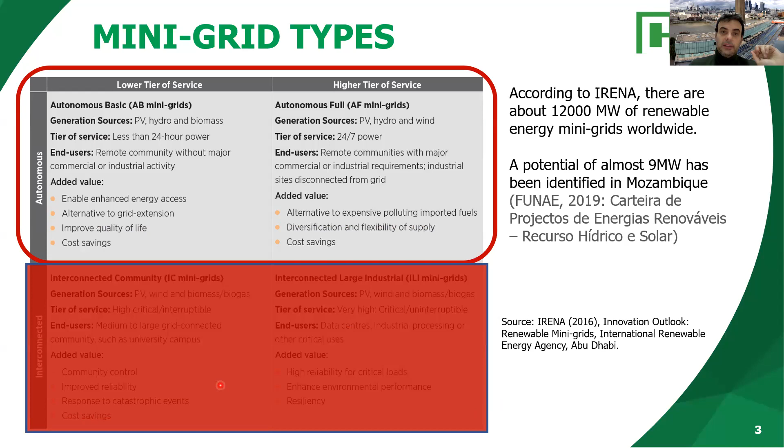Remember, for these case studies, we are talking about mini grids that are autonomous or off-grid. Remember, the world of mini grids is very diverse. We have off-grid, but we can also have interconnected mini grids. All of these we have seen in this course. Different examples, different concepts. Today we are continuing exploring the case of the off-grid mini grids with the particular experience of FUNAE, and the particular steps that we recommend

for the pre-sizing. Always the energy demand on a daily basis. What is your watt-hour per day or kilowatt-hour per day consumption? What is the potential evolution of this consumption? Typically for mini grids in off-grid areas, there will be growth over months or some years. Then the availability of solar resource, we have discussed this plenty, the sun peak hours, our irradiation maps, some website platforms, etc. Also taking into account the variation of the solar resource during the year. Then we move to the calculation of the photovoltaic power to be installed.

Sorry? Somebody's talking. Oh, okay. Yeah, it was Jaime who was entering. He was joining us. Okay, please remember to be muted. Okay, thanks.

Where was I? Yeah, the calculation of the PV system, PV capacity, then the mounting system. What kind of structure are we going to use? Remember in our session about solar farms, we discussed the tracking systems and the convenience of including this kind of increased production, but then we cannot put the same amount of PV capacity. So there is a trade-off there. And of course, the different power conditioning equipment, the charge controllers, inverters, protections, monitoring systems, etc. So with all that in mind, now let's remember our challenge that I gave you last week.

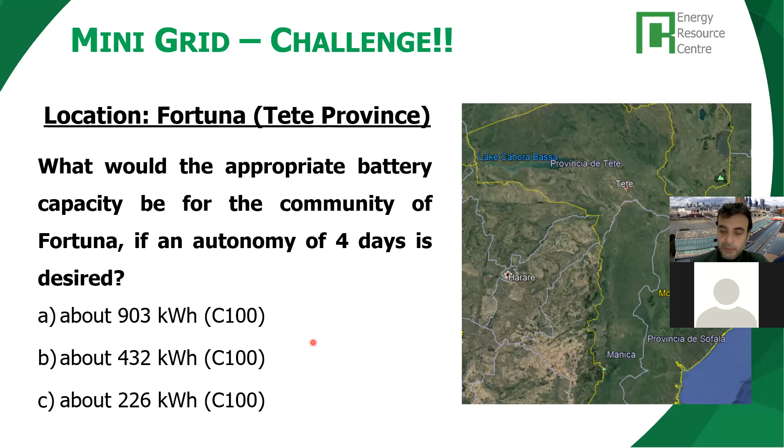So I would also expect a figure around 432 kilowatt hour. Okay, so thank you very much for participating in the poll. I think that was useful for this exercise. Yes. Question. Can you explain the logic for your response on number 2? Number 2 is this one, yeah? The PV generation capacity. Yes.

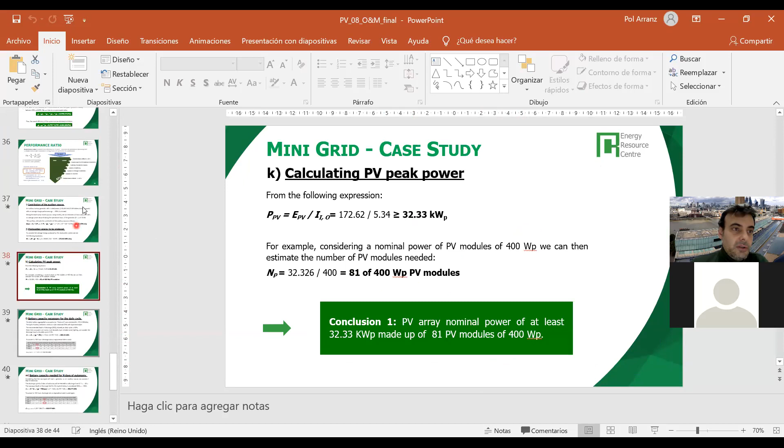Oh, okay. So once we have the demand, what do we do? I have here ready the notes from last session. When you have your design demand, in this example it is 67, more or less, then we need to consider our sun peak hours and the performance ratio. We have done this exercise. So basically we take the sun peak hours. Let's do the calculation. Let's go back to our exercise.

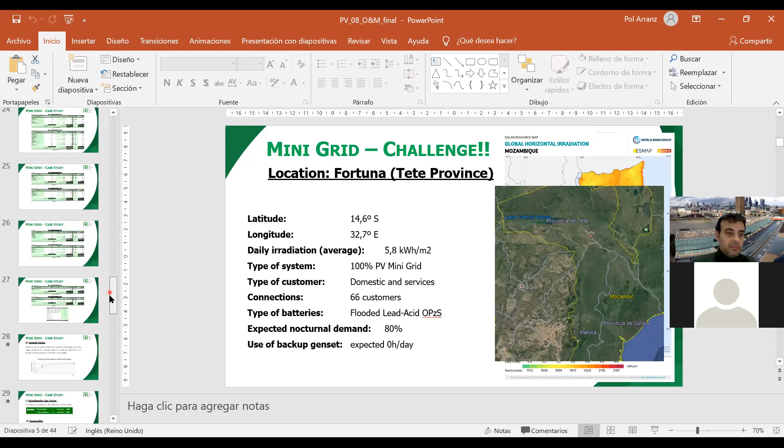You have 67 kilowatt hour per day. You divide that, not multiply, by the sun peak hours, which is 5.8. And then you divide that by your performance ratio, the overall efficiency, which for this kind of systems, remember in our lessons, we normally take between 55 to 70%. So let's take 60%.

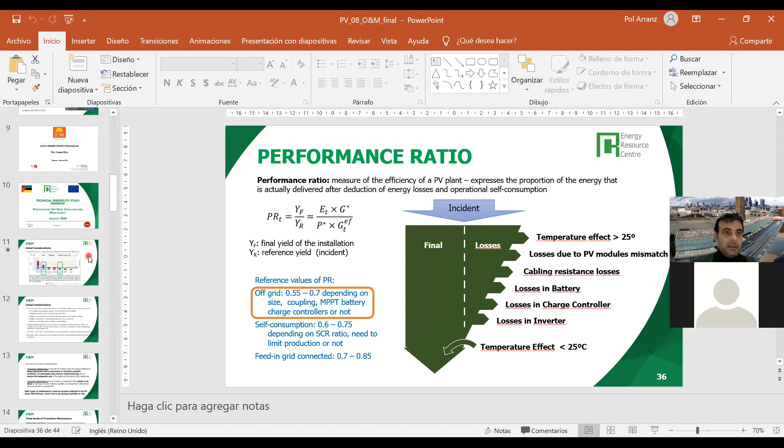If you take 67 kilowatt hour per day demand, let me write it here, and you divide by sun peak hours, and then divide by your performance ratio, which I am considering 60%, so 67 divided by 5.8 and divided by 0.6, you get 19.25, which is closer to 20. Did you follow me? Yeah, great, thank you.

If you go back to the sessions about PV generation, you will find the formula. It's always the same formula. The energy generated per day is your power in kilowatt peak times your sun peak hours times your performance ratio. So this is the 67. You are looking for this. So you need to play with this equation. I'm giving you this 5.8, and this one you can take it 60%. Yes, Kemal? Yeah, thank you.

Thank you very much, Engineer Nelson Bila. It's been a very interesting presentation. Thank you very much, you did very well, very clear. Now it's time for questions and debate. Any questions, please? We are opening the microphone for all of you in the session today, so feel free, please.

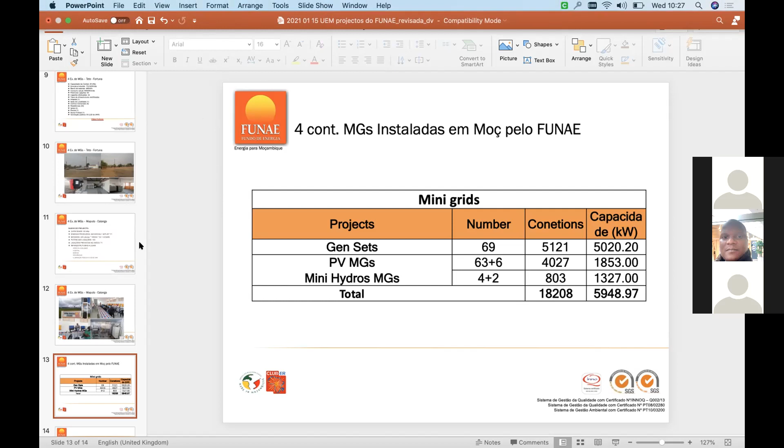Just one quick question from my side. The public lighting, yes, the street lighting, is it something you always consider for the mini grids, or it depends on each project? Iluminação pública. For all mini grids, we include the public lighting.

Okay. Yes. And the cost of the public lighting, there is no tariff, right, associated to that? No, they are not. We don't charge for that. And some of the public lights we use, they used to be individual public lights. They don't depend on the power from the grid. They are independent.

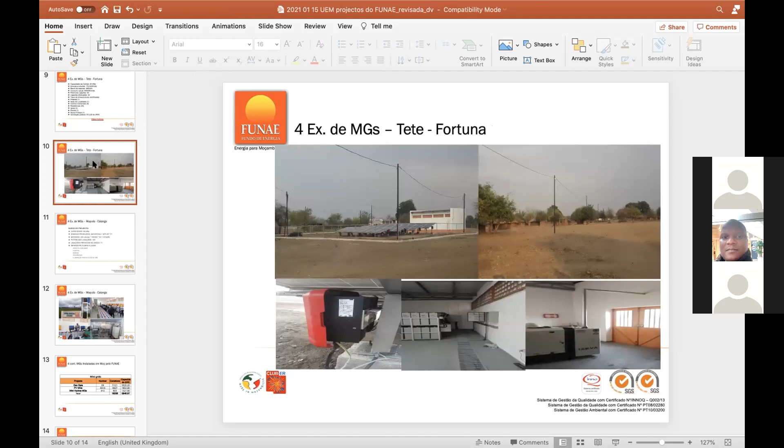I didn't bring the public light that is powered by the mini grid, but some of them in Calanga, for instance, they are autonomous. The street lights. Yeah. Okay. They are solar street lights, autonomous. Yes. They don't consume from the grid. I see. Yes. We put them only in the locations that are needed, but some of them are independent.

I understand. And the tariff structure, is this a particular tariff that has been defined by FUNAE for mini grids, or is it a tariff that has been defined with EDM? What is the tariff scheme here? Is it only for mini grids, or is it general, like the EDM tariff for the grid? Yeah, at this moment it is the tariff defined by EDM. Okay.

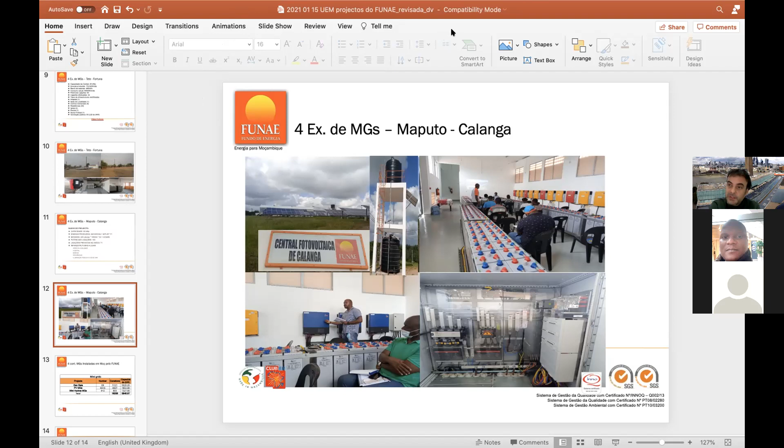Okay, Dr. Lucas, shall we take a break, 5 minutes, or shall we continue a bit more and we close early? What do you prefer? I think we could continue because by 11 something we should stop, yeah? Maximum 11:10. So I think we can continue as we have been doing the last 2 sessions. Okay, so we don't take a break now. Okay, that's fine. Hello? Yes. Thank you. So we will continue then. Let's continue with the presentation. You can see the screen, right? Okay, excellent.

We were here with the presentation of Engineer Nelson Bila. Okay, so we have half an hour, a little bit more. We can take this time to discuss some issues about operation and maintenance. First of all, some initial considerations about maintenance and the operation of off-grid systems. In this case, we're talking about mini-grids.

So I think it's important to remember that our PV systems, we design them and we consider them because we expect to have long operational lifetimes. We know the warranties of the PV panels are for 20, 25 years. And apart from that long operational lifetime, we also appreciate from photovoltaic technology the fact that they have low operation and maintenance requirements, meaning low operation and maintenance cost in the end.

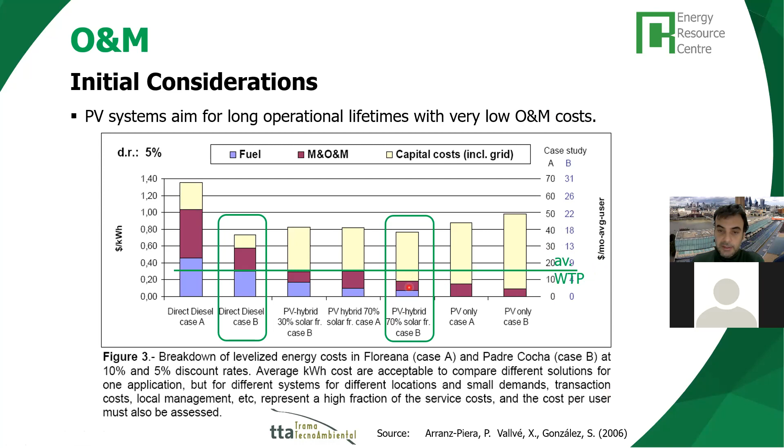Okay, some other considerations for the operation and maintenance. The preventive maintenance duties for PV plants are relatively simple and should not be costly. Yeah? It shouldn't be too complicated. We are talking about the cleaning of the PV modules. Of course, every time we talk about cleaning PV modules, be careful with working at heights. Yeah? Even if we are working in rural areas, these proper health and safety provisions have to be observed.

Vegetation control, the prevention of any shading on the PV modules, that's important to be observed in our maintenance programs, together with the regular visual inspections of all the elements. The structures, the bolts, the joints, the electrical connections, the cablings, etc. The protections, the fuses, the boxes, etc. We also need to remember that our component manufacturers will be recommending some tests, some regular inspections, some routine checkups of the equipment, etc.

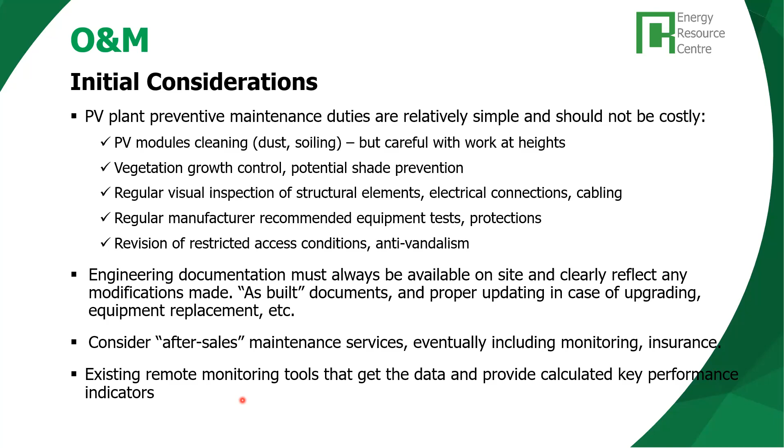Also, in connection with that talk that we had with engineer Tarragó, if you remember, he mentioned essentially 2 types of maintenance. We have the preventive maintenance and the corrective maintenance. Preventive maintenance is all we can do to plan as best as we can: our routines, procedures, tasks, to keep all the equipment and all the components in the best possible condition for optimized operation. So we want to anticipate, prevent any problems or malfunctioning, and ensure that the plant is at its best to provide the electricity service.

Of course, sometimes incidents can happen, problems, we can have some storms or whatever situation that is not foreseen, and that entails immediate action, corrective maintenance to correct these incidents, to address it, to fix it, restore the malfunction in a certain component or the equipment.

In any case, these both types of maintenance have to be well addressed and defined in our operation and maintenance manual. When you do a mini grid like Fortuna, Calanga, there's always an operation and maintenance manual that defines who has to do what. First of all, who is the maintenance manager? Who are the technicians that will have to take care of the preventive maintenance tasks, and which tasks are needed.

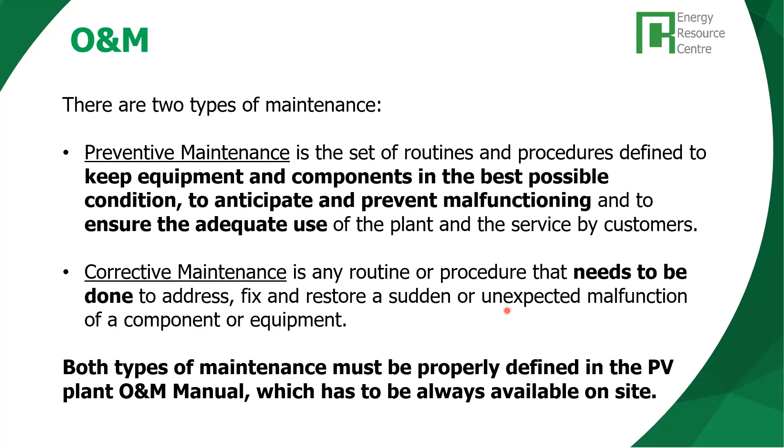We have preventive maintenance tasks that are done locally, very basic tasks, what we call the first level or the basic level. This is typically performed by a caretaker, a person who could also be a resident in the community. This is a job that can be created actually in the community, which is nice. Sometimes in some mini grids I've worked in, there are 2 shifts. So there's 2 people doing this job, 2 caretakers, 12-hour shifts, if you want to have 24 hours.

And this person will be checking all the elements of the mini grid, for the surveillance, inspection, basic upkeeping to keep the place clean and organized. And that person can do some simple weekly tasks to check the conditions of the PV panels, the conditions of the batteries, and very important, record and report any incidents to the site management structure that has been defined for that particular mini grid. Okay, so that's the level 1, basic.

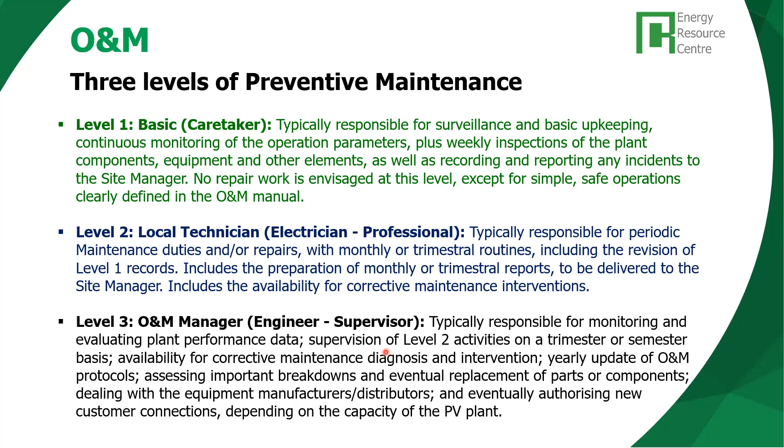In any case, the operation and maintenance manager or the supervising engineer has to diagnose any situation that arises, has to be available for corrective maintenance decisions, has to update the operation and maintenance manual in case there is something that has to be changed, has to be in communication with the equipment manufacturers, the dealers, distributors, etc. And also control in a mini grid the evolution of the new connections, because some new connections can be requested and the plant might have capacity or might not.

We have technical standards for maintenance of PV systems from the International Electrotechnical Commission. Basically, we have technical standard 62257-6. It's a specific standard for maintenance of small renewable energy and hybrid systems for rural electrification. So this is essentially the standard we can follow.

And imagine you, colleagues from FUNAE, from EDM, this is what I would recommend you to include as a specification, as a requirement when you prepare your projects, when you prepare your tenders, when you contract, to include these normative references.

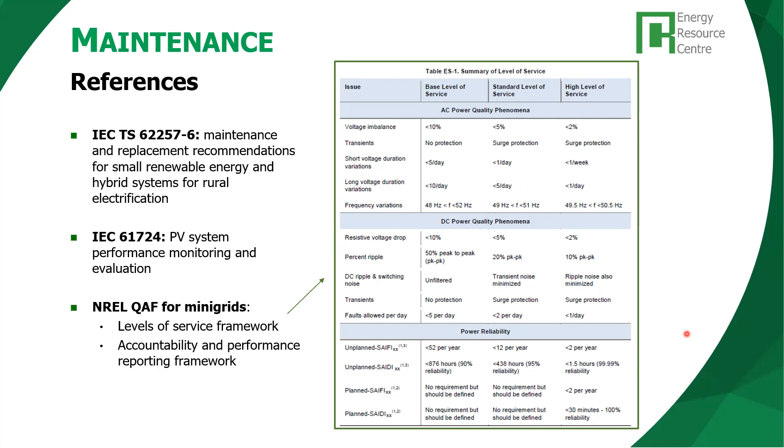There are some other specific references about performance monitoring, evaluation. From the US, from the National Renewable Energy Lab, we have the quality assurance framework for mini grids that also defines different levels of service and performance levels, what would be the basic level of service, standard level of service, or high level of service, with some thresholds and key performance parameters that will tell us how a mini grid is performing, if it's good, bad, properly, improperly. So these levels of performance can be defined.

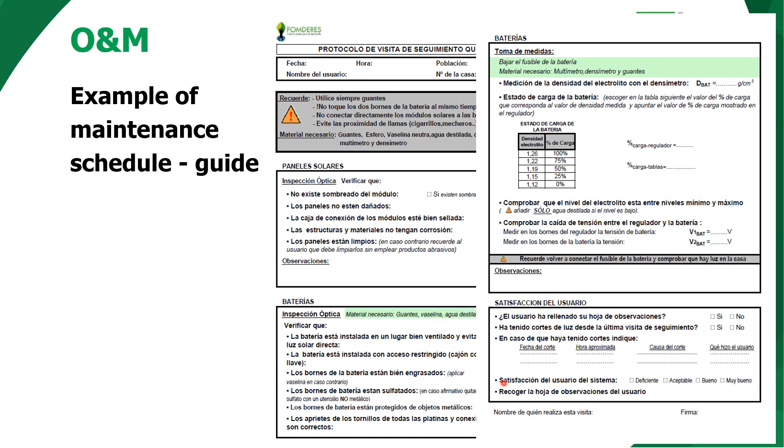So those are the different options we can follow to prepare our operation and maintenance manual and the specific tools to help the sustainability of the mini grid service.